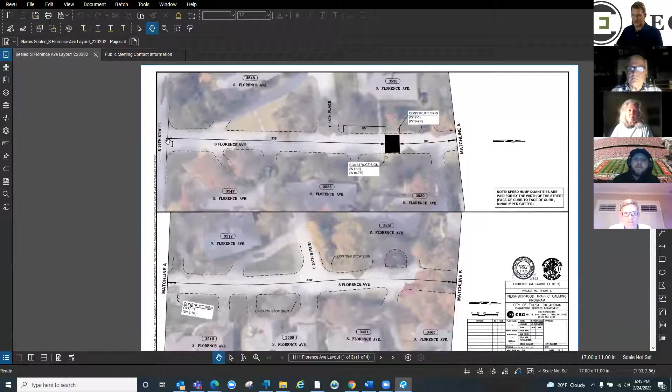On the top left corner, that's the south end of the project at 36th Street, with north pointing up to the right. Our first speed hump is about 330 feet from the south end of the project. Generally we like that a little closer, but with the drives located through here and the proximity to 35th Place, it caused us to push it further north.

We generally try to keep these speed humps, if possible, about 10 feet away from driveways — more if we can get it. The reason is people backing in and out of their drive, we don't want them hitting the speed humps all the time. So we try to get more space between the driveway and the speed hump when we can. We also try not to put them directly in front of sidewalks.

As you can see on this first speed hump, there's a sidewalk going off to the north, but at least we didn't put it directly in front — it's slightly off to the side. So our first speed hump is located just north of 35th Place, around 3530 South Florence Avenue.

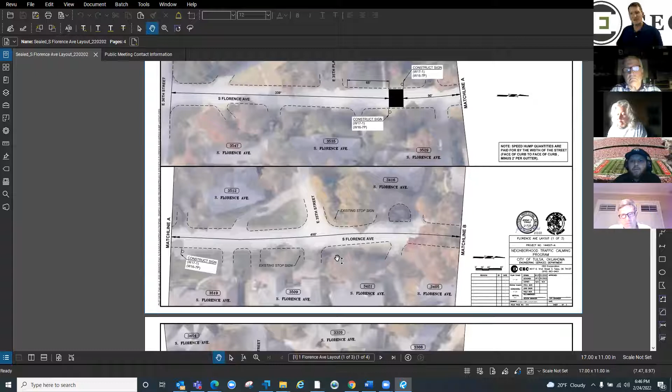Now we've got a big long gap to the next one, because we have stop signs at 35th Street, and we try to keep speed humps away from stop signs since people are already in the stopping motion — we don't want that to happen at the same time. So we stretched this distance to about 600 feet to the next speed hump, shown on the second sheet, immediately south of 34th Street.

Then it's close to another 600 feet from there to the next one. Again, we tried to keep this one a little further from the stop sign at 33rd Street. This speed hump is around 3255 South Florence Avenue, at the bottom of sheet number 2.

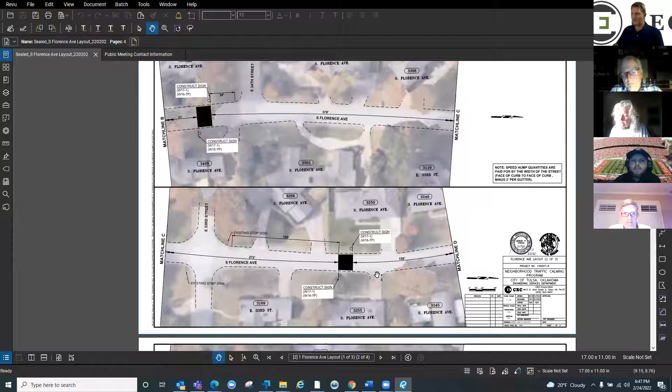Moving further north, we've got about 400 foot spacing to the fourth speed hump, shown around 3220 South Florence Avenue. Our last speed hump, the fifth one, is just north of 32nd Street, approximately 300 feet from 31st Street to the north. The fourth sheet in your plan set is our speed hump details.

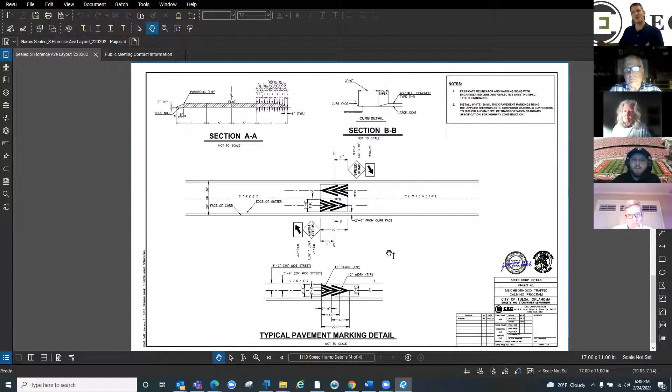I want to focus on what these look like and how big they are. From a plan view, like looking down on the street, this is what the speed hump looks like — it's 22 feet long as your car goes over it. We put this 2 feet from the face of the curb to allow storm drainage water to flow down the street.

As you can see, we've got pavement markings on here per the Manual on Uniform Traffic Control Devices, MUTCD, which governs signage locations and striping. We have signs on the corner of each of these that say speed hump with a little arrow pointing down. Besides the striping on the pavement, this is another notification for drivers to know there's a speed hump. I know the striping will fade over time and the city will do their best to maintain it, but the sign will remain there for a long time and people will be able to see that.

The sign is also there for events like we've had this week, with snow, ice, and sleet. Sometimes it's really hard to see the speed humps when you've got several inches of snow. So if the city or other private entities are plowing the street, we want them to know that speed hump is there, so they can make an adjustment and not damage the pavement or their plow.

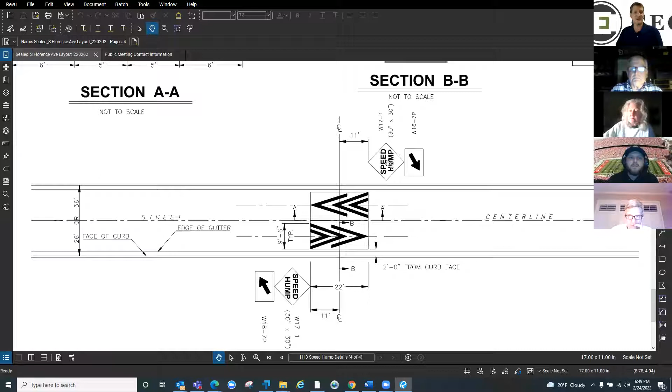So that's what the plan view looks like. From an elevation view, meaning we're looking into the side of the speed hump, this Section AA at the top left corner of the page shows that. The very first 6 foot, the approach, is parabolic in shape. It increases from the existing grade up to 3.5 inches over a distance of 6 foot. It's not linear, it's parabolic in shape, but it's a very gradual transition, and it rides really well.

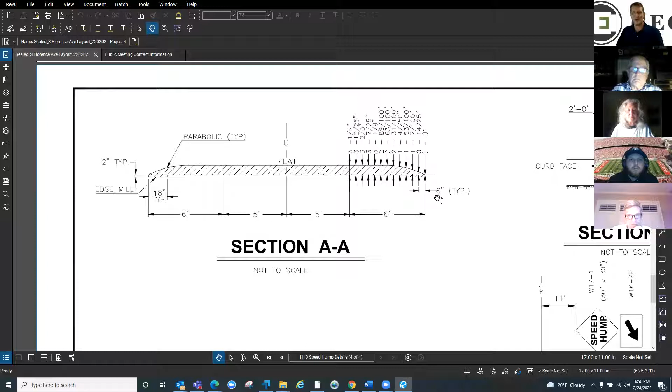If you're going 20 miles an hour, you can go over these speed humps really well, they ride very nicely. There's a platform that's fairly flat on top for 10 foot, and then it shapes back down in a parabolic shape. So these are not speed bumps like you see in commercial areas. They are speed humps, and they do drive well so long as people do not drive at excessive speeds. That was the intention of these.

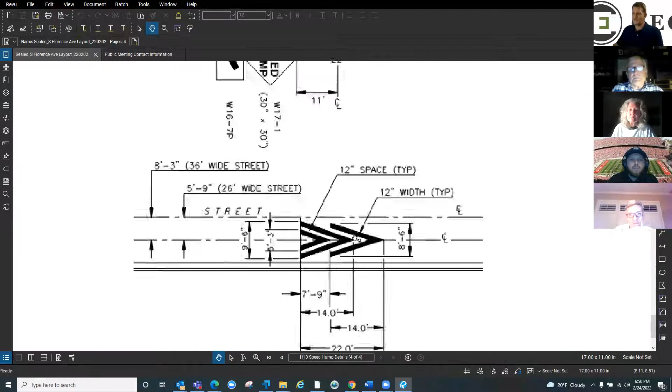This detail down here at the bottom shows the chevron markings for the pavement detail, typical painting for that.

Okay, let me move on with the rest of this. As stated before, our funding source for this program is the Improve Our Tulsa 2 funds. I'm going to stop sharing the screen here, but I'll be happy to go back to that if anybody has any questions.

Construction will begin on this project as soon as possible. One thing that happens after this meeting is we have to allow a 2-week comment period for comments you or others on the street may provide, so we can address those if possible. The city will typically get this video posted on their YouTube channel within a few business days. I anticipate they'll have it up by sometime next week, and that 2-week countdown will start there.

Once that 2-week time is done, if there's anything we can address by changing the plans, we do that, and the plans are finalized and sent off to the Streets and Stormwater Group at the city. The funding is already available to start this.

So the only thing that would be slowing them down is the colder weather. Obviously, we can't construct these speed humps with temperatures in the 20s, so we've got to wait for springtime. Typically by mid to late March, it's warm enough to construct these. Another thing that could hold them back from starting in late March to early April is if there's a lot of road maintenance issues, which get exacerbated dramatically when we have these freeze-thaw periods of time.

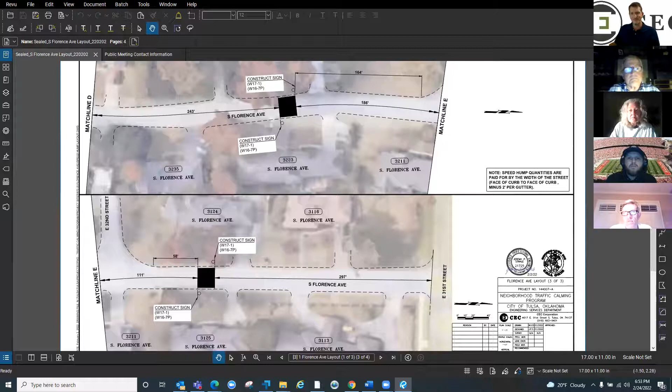I'm now going to go back to the plans, and if anybody has any questions at all, now is a good time to ask. Hey Jeremy, go to the very last page for a second. One thing I want to talk about was section BB - if you can zoom out on that, please.

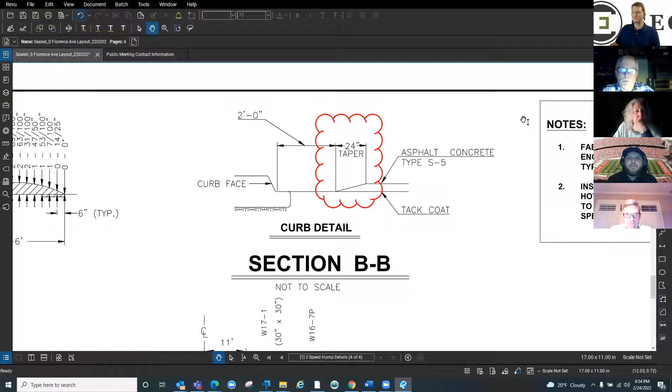So this detail right here shows the beginning of the speed hump from the face of curb, which Jeremy mentioned earlier was 2 foot. We've had requests from bicyclists to add a 2-foot taper to shallow out the edges of it. We'd had some speed humps in the past that weren't as bicycle friendly, and so we got asked by the Bicycle and Pedestrian Advisory Committee to reduce that taper to make it so bicyclists and pedestrians could walk by there a little bit easier. So it not only helps bicyclists, but people pushing strollers or whatever else - it just makes it a little bit more usable speed hump for all users.

Very good, thank you Russell. So does anybody have any questions over this or the layout? Or any questions in general at all? It's what this meeting is about, is to answer any questions you may have.

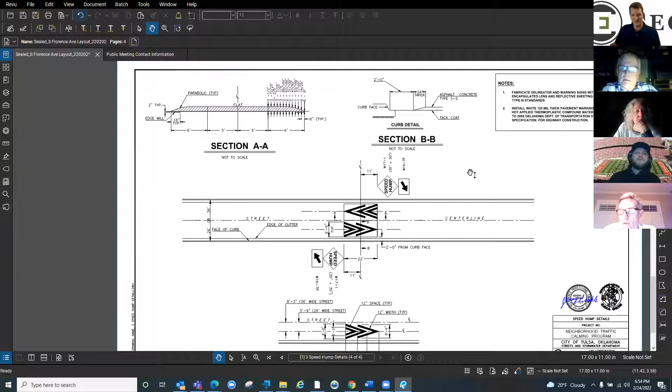Jeremy, I've got a question about the location of the last one in the order of how you've gone through things. That's the one in front of - I'm at 3124 and Dennis is across the street at 3125. Since we don't have it - actually, as you go around the corner on 32nd, we have a proper curb that starts at the corner and runs to the west. But for whatever reason, it seems like they overlaid it enough that the curb's kind of gone, so be it.

We're at the bottom of the hill and I get a ton of runoff water that comes ripping down off my property. And if you can believe it, the house at 3116, when we had that crazy 4 or 5 inch rain, he had a lake underneath his house that was leaking out of his crawl space vents. There's a transformer vault right there - we had surface water going into the vault and making its way through the conduit to the back of Dennis's house and coming up and out of his meter can. So it's possible for us to get a lot of water.

We're kind of concerned about the location of that speed hump, since we don't have gutters, that it can create a dam and start sending water into his yard. There's a manhole cover right where that transformer box is, and the sewer line runs underneath the fence between my house and 3116 and runs up the hill to the west. We're wondering if that speed hump could be moved to the north and placed there so that whatever surface water we've got isn't dammed by this thing, since we don't have good gutters.

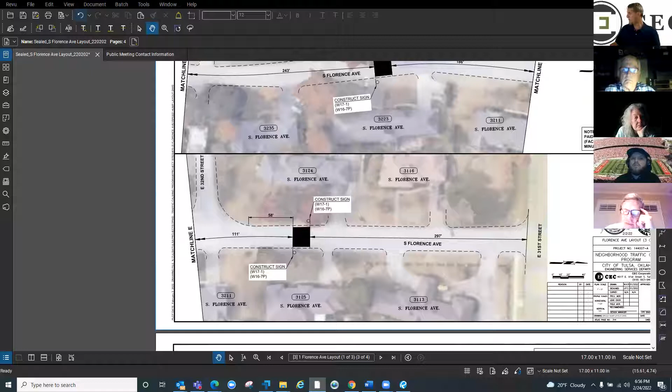Sure, I pulled this up on Google Earth where we could see this a little clearer. So as you said, this is the transformer vault in question, and then we've got a storm - I'm imagining this water manhole right in the middle of the street. We can look into that - it might be possible to put it right up here, in that location. The runoff, elevation-wise, this thing runs to the south here, correct? Okay, very good.

We can look to see - it's too close to try and put it in between here, the driveways are too close together. And this we don't want to do either, because you'd have to push it up pretty far to the north. Visually, how long are your driveways, about 22 feet? They're 22 foot, and we try to keep it 10 foot away from each drive. So we need a space of at least typically 42, preferably 48 or 50 foot in order to put that speed hump in there.

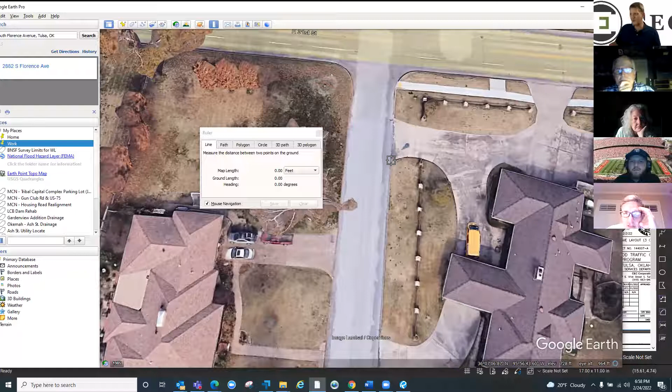It very well could be possible. Mary's got a full turnaround, so I don't think it'd be an issue if you came back and put it close to there—I just don't know how far off of that manhole you need to go and how close you get to Mary's property. She's got that yellow van in the picture. Nobody ever backs out of that driveway, the one here to the south—no, that one right there. So I just don't know if there's enough space between the manhole cover and the start of her driveway on the east side.

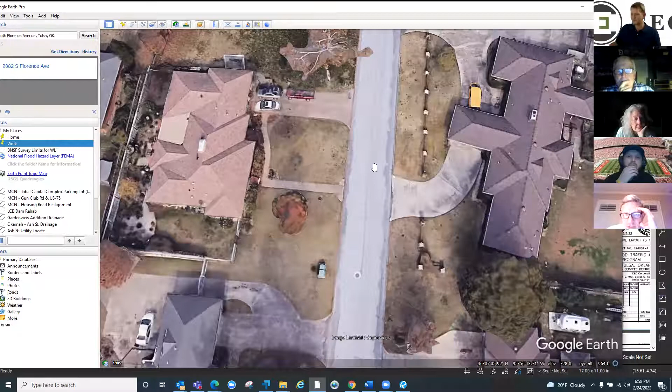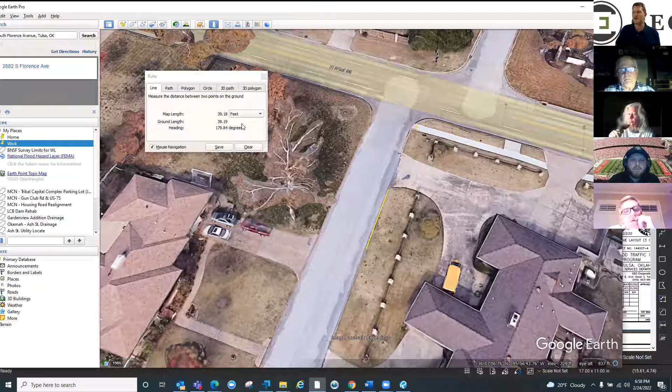I believe the reason we pushed it this far to begin with is the gap we have up at the north end. Taking a distance from that radius up to about right here, that distance is about 40 foot, so it's pushing the limits of what we desire. We could put it in there—we'd only end up with about 8 foot or so on each side. But that may be the next best place to put it, right up there.

The spacing would be too short right here, and I don't think we gain much by putting it right here because we're still right by that transformer, like you said. I'm okay with it being by the transformer, because then somebody's less likely to drive around it, since we don't have much in the way of curbs. I just don't know if there's enough distance between her edge and that manhole cover, since no one ever backs out of her driveway, and I don't see her having an issue.

Right, and it keeps you a little further off of 31st Street, but the concern I'd have is that we have to stay clear of the manhole and the rim around here. So the speed hump would have to start here—the distance I measured with that yellow line is only 26 foot. That would put the northern end of the speed hump probably 2 foot away from her radius, which is pushing it for us to do. I know she normally doesn't back out that way, but if someone's traffic pattern took them south to 32nd, they'd be running over that thing at times.

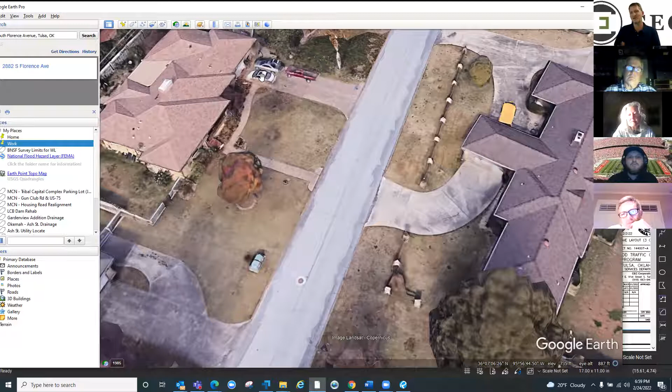So based off what you said, the best place for us to move it would be up here, a little closer to the intersection. We're in good shape with the distance between that next speed hump to the south—we wouldn't be exceeding any distance there at all. So we could probably put it right in this area here.

Hey Jeremy, that distance you're proposing right there, how far south of 31st would that be? Not very far—let's go back to Google Earth here real quick. We'd end up being probably 70 foot away from here. I know ideally we'd prefer it to be a little further than that.

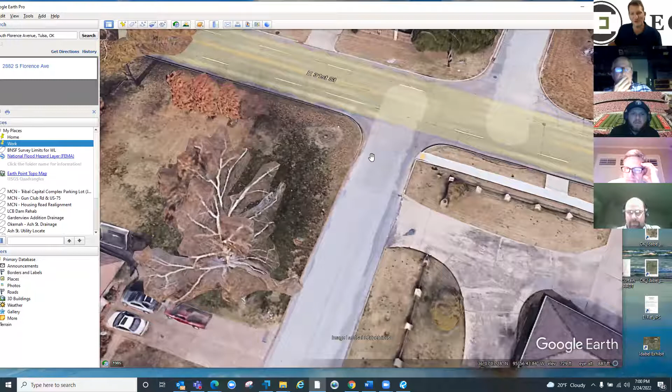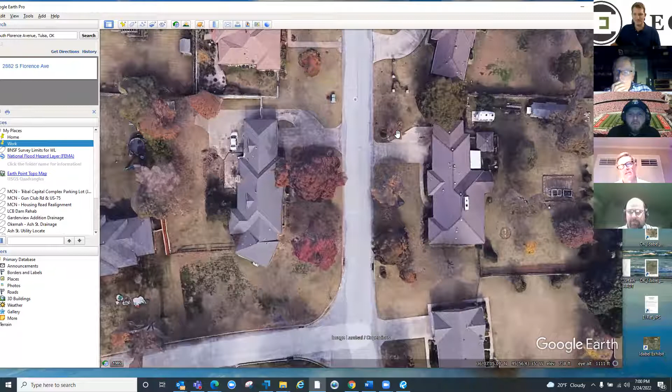Yeah, if that doesn't work, do you guys ever incorporate stop signs as part of this? Because I guess we could consider putting a stop sign there at 32nd, at our intersection. I don't know if that's an alternative. Go ahead, Russell. Yeah, stop signs aren't meant to be used as a speed control. Under the MUTCD, you have to do a warrant analysis and prove that it's actually needed, and the MUTCD does not recommend using stop signs for speed control.

Okay, well, we'll take a look at that. Yes, sir. So that speed hump that's the furthest north—if by chance we take that one out, we'd have the 297 plus 111 plus 186. How far would that push that last speed hump from 31st if the one furthest north is taken out?

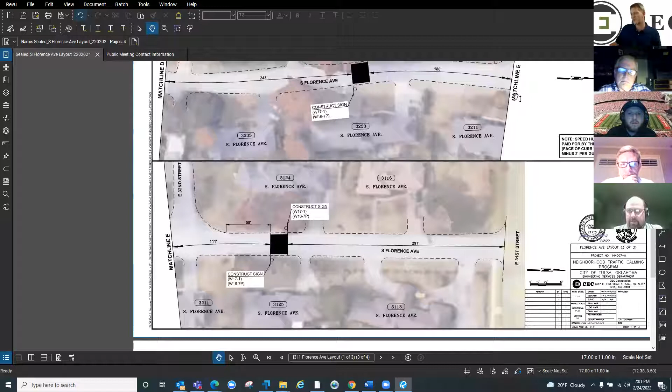Well, what we could do—the one at 32nd, I'd have to look at it, but since there's no stop sign control at 32nd Street, we could slide this speed hump up closer, to where that gap to match line E might be around 80 or 100 feet. That would push us around 350 to 380 feet from the intersection, so eliminating this one might be the best choice, and we just slide this speed hump up further to the north, closer to 32nd Street.

It might be better to do that, especially with the big sump inlets right on his property. That might be a better option than having that one so close to the 31st. We have guidelines that we try to stay between.

It's things like this that we just have to think outside the box. Of course, we don't want to squish it so close to driveways that we're violating that principle. The better thing would be to eliminate one and try to move things around a bit. So I like your idea, Russell.

We could slide this speed hump up further to the north and eliminate that one entirely. That way people coming right off 31st Street aren't hitting the speed hump within the first second and a half or two of their travel, and that way they're not having drainage issues like they're mentioning.

Would that work for you, Bill and Dennis? I'm okay with that, but Dennis, you need to come off mute and let me know if that's an issue or not. You can unmute down in the lower left corner. Or maybe Jeremy, you can unmute him. Okay, can you hear me now? There we go, I can hear you now, Dennis.

If you eliminate this speed hump between 31st and 32nd, there are a lot of people that come down this hill on 32nd Street, fly down that hill and spin around that corner almost on two wheels, and fly up to 31st Street. If you eliminate that hump, that's just going to keep happening. This isn't going to do any good down at this end.

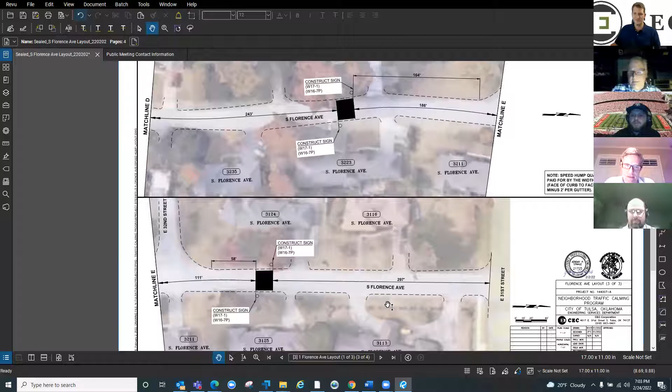So you got to do something. I don't know, either put a stop sign here, and that might not be a bad idea, putting a stop sign. Can you see my cursor?

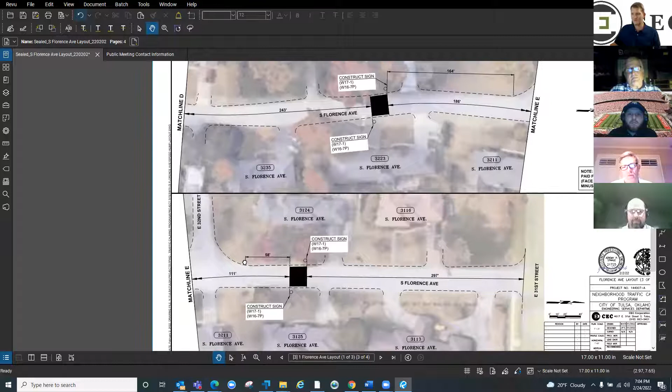No, I can't. You're talking about putting a stop sign. Coming down 32nd Street when you hit Florence Avenue, for people coming from the west to the east, put a stop sign there where these people have to start stopping. So if you eliminate this speed hump altogether, you at least need to put a stop sign in there. And I think that's what they were saying, that stop signs aren't part of the interaction with this, Dennis.

Okay, I think the alternative is maybe - I don't know how this jams up the one further down the road - but if it's got to go between us, if you move it, you're putting it too close. I think it's too close to 31st Street. And if it's too tight to come off of the manhole cover, then it's got to go further to the south.

Right, and that was ideally why we put it in the location it was at. This distance of 297 is technically further than what we ideally want the speed hump to go. We generally try to keep it within 150 to 250 feet from the beginning of the block. So we already violated that because there's no way we could move it into this ideal range because of the manhole and because of the drive location.

So at this end, we put it at the ideal location. It just happens to be near that drainage inlet. Of course, we're not in front of that drainage inlet, but I do know putting this speed hump there will cause more water to move out that way.

I'm interested in the drainage patterns of 31st Street. There's a lot of water that comes off 31st Street, and it is possible to look through the city's programming over the next few years to see if there's any street project going on there, because it may be possible to improve the drainage inlets up at the arterial street to help mitigate some of that water from coming down the street. I've done that on several of our designs where residents on local adjacent streets were complaining about runoff coming off the arterial.

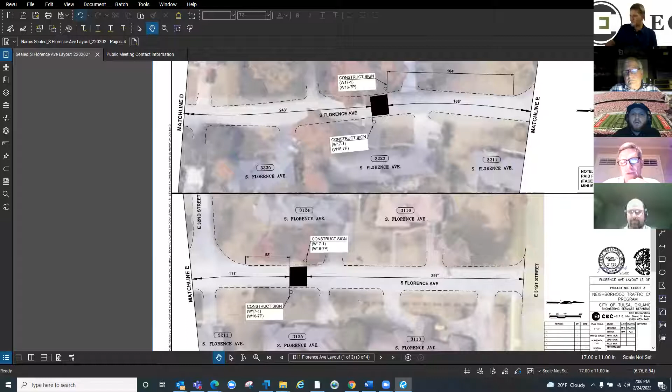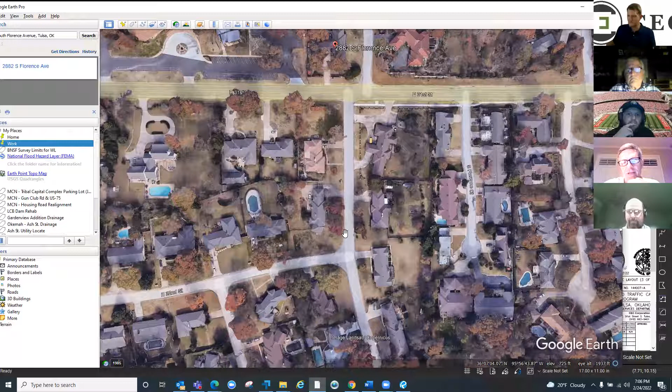There used to be a creek that ran behind Dennis's house, and that's the low spot. On 31st, all the water stays on 31st and ends up in the storm drains down there. When you get past 3116, just past the south edge of their driveway, that's where the crown happens. Anything from there south comes to us, and anything north of that goes to 31st.

So does this water come down here off of 32nd? Is that where the bulk of the water is coming from? No, it's coming off my property through drain pipes. It's actual surface rainwater—we're at the bottom of a pretty big hill.

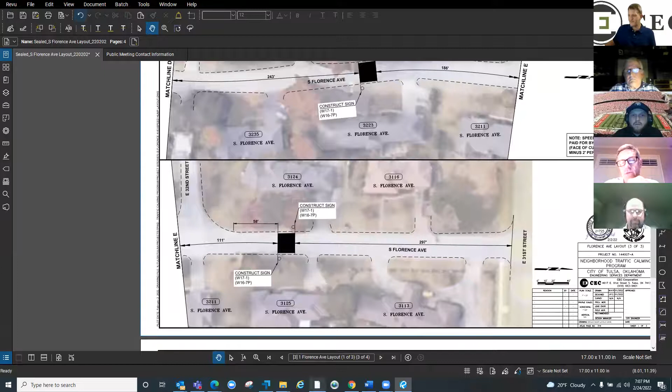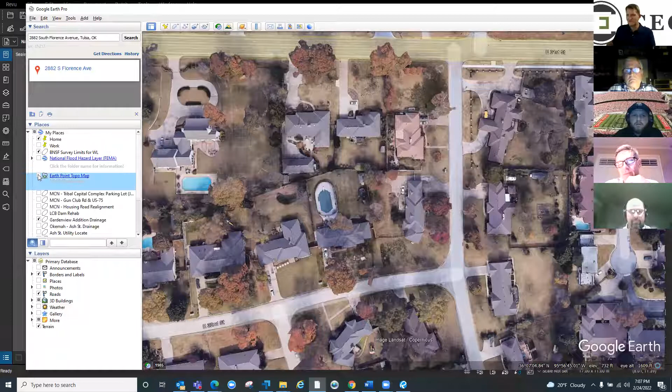Okay, so any of the water on the property that's coming—if you go back to that house, where you've got your cursor all the way up to that house, that's the farmhouse with the pool in the back and the big build out. Anything from there, surface wise, comes traveling down and ends up coming out between my house.

No, this won't help much—it's too fine. We're zoomed in too much on these topo maps. Won't do any good. Those topo maps do great when we're looking at miles of area.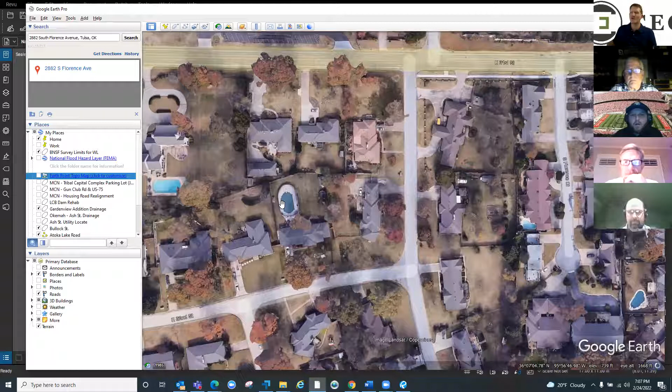So I understand what you're saying—the runoff comes from all the properties to your west, and they all flow through your backyard and into the sump, correct? Yeah, or we're catching them in catch basins and whatnot, and then it comes out, and Dennis just sits below me. So if we put a big dam, all of a sudden we can flood out his garage.

So it's about trying to find a way to slow down the cars without creating a big water issue. Most municipalities have controls when it comes to allowing sheet flow over properties—they only allow so much, and then they require it to go into inlets. The whole purpose is they don't want 10 neighbors' yards worth of water running through you because you're at the bottom of that basin. But they didn't design it that way back in the years—there were no guidelines or controls to prevent that.

Yeah, I've stopped most of it. That's to the west of the house, to the west of me, where your cursor is, covers the pool. I don't get much from them anymore—that goes into a pipe that's running out to 32nd. But it's the houses behind that—I've got a French drain and a catch basin now that's taken their water, because what I built would have flooded 3116's property.

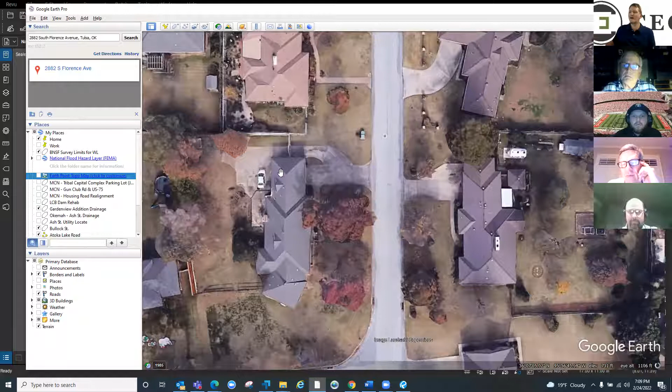So I knew I had to let that water come through, and right now it's on the surface, but it's going into a pipe that's going to have a pop-up right there by the transformer vault box. Dennis and I've seen it as I've been doing construction back here, where that white car shows on my property—there's now a big addition in the back. So I've dealt with all the water, but it comes ripping around my house and down the driveway like a river, so we're trying to figure out the best way to do this.

I know this isn't your purview, and I'll leave it to Dennis on the decision to put the speed hump where he wants it, because he faces the issue more than me—people ripping around the corner and coming down in front of his house at 35 miles an hour.

What is the process of putting in a stop sign if we wanted to go that route? Call 311 and put in a request to put in a stop sign. Okay, and then once that request comes in, we'll do a warrant analysis to see if it meets the warrants per the MUTCD. If it meets warrants, then we can install one, but if it doesn't meet it, it wouldn't be installed.

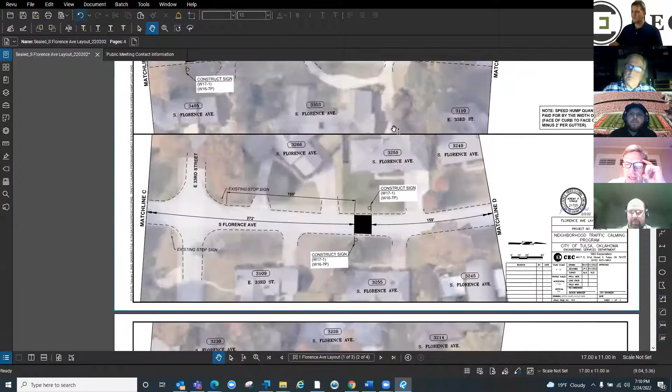Yeah, the stop sign in the middle of this whole plan down there at 33rd-ish wasn't there forever—that one got added maybe 5 years ago. Time goes by, it was probably more than that, but it seems like that was about when they got that one put in to try to calm some of this.

I do know there's been other speed hump projects we've worked on where people knew the right city council member and said, I need a stop sign there, and in the past they got their stop sign pretty easily. The city has gone to the tried and true method of looking at the warrant analysis for MUTCD, and not just haphazardly throwing stop signs around, because they can make the situation worse potentially. That's why they've got that warrant analysis.

That stop sign very well could have gone in through that methodology, because the people who worked on other projects said, yeah, that's so-and-so, he knew Councilman so-and-so and he complained and got a stop sign in. And the city won't do that anymore.

Got it, okay. Well, I appreciate you letting us know about that. We'll take a look at it. If you put that process in, request it through 311, and Russell and his staff will go through and take a look at that.

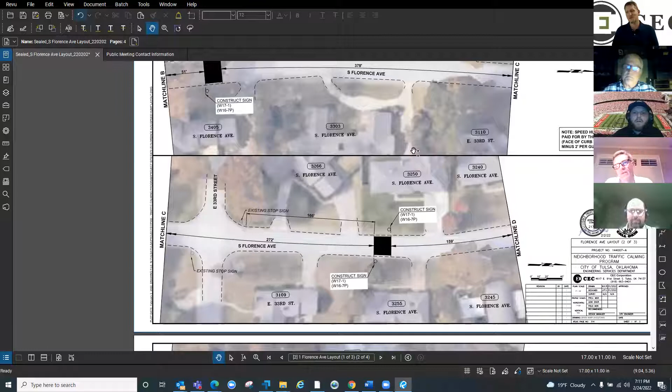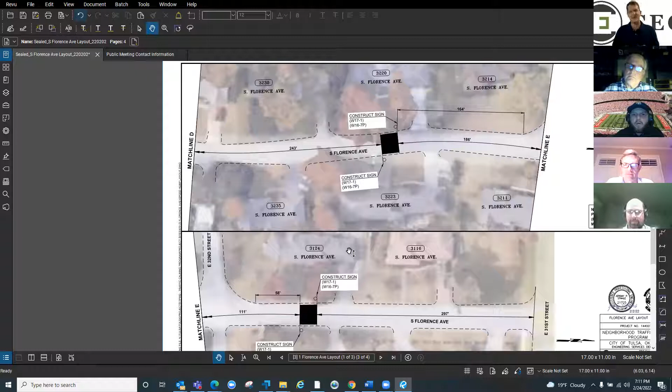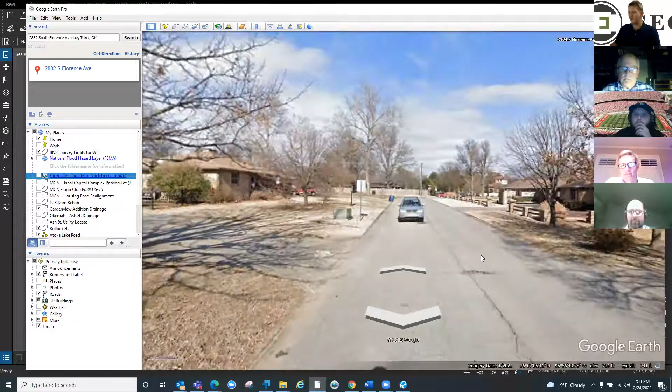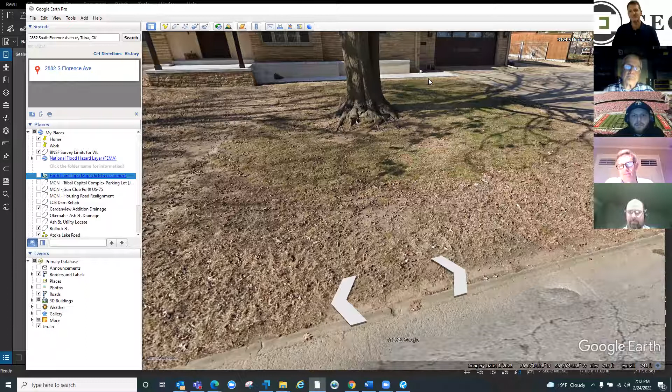I do think the best option is probably to keep the speed hump where we've got it. Ideally that's the best location for it, or we eliminate it, which I know Mr. Murphy is not in favor of because of the speeding in front of your properties. Drainage-wise, this is the sump area, and putting that speed hump in there, especially knowing the curb and gutter sections—let me pull that up and go to street view. Like he said, there's not much curb left. So it will create a bit of a dam there, but the water just flows over the curb like it does now. It's just a big broad drainage area that runs with the water. The finished floor elevations of the houses look high enough that it shouldn't cause a problem.

Hey Jeremy, this is Michael. From looking at the engineering atlas, there is a capital project shown on Florence Avenue from 31st to 36th, currently in design.

Who really? Yes. Wow, I'm surprised we missed that somehow. Do you know who the consultant is on that? CP&Y. CP&Y, okay.

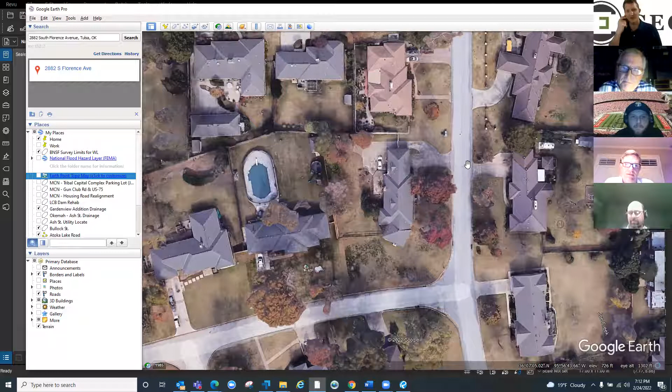What that means to everybody here is, if this street is going to have a rehab project on it, this project very well could delay this, because we don't want to construct these speed humps and then have them ripped up in a year or two for that project. But we're all in favor of having this project constructed at the same time as that one.

The good news about this project is those curb and gutter sections we're talking about issues with—they will come back and probably end up reconstructing the roadway and putting a good curb and gutter section back, which will help when that water hits the street. It won't go flying out into the right of way as much. So that's the good news about that.

I appreciate you finding that, Michael, because that will help with the drainage issue. As a matter of fact, what's the time frame on that?

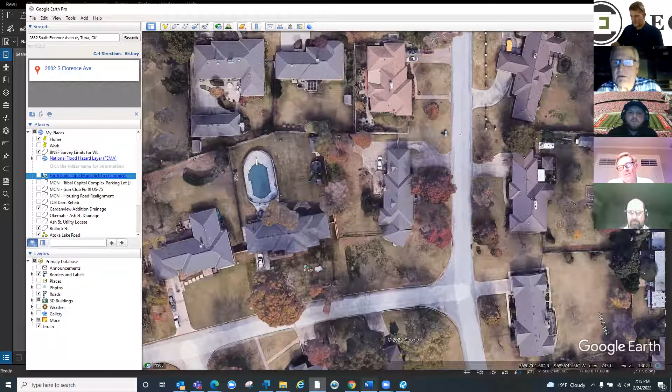The curbs are not like this the entire way. Actually, once you get past 33rd Street, they do have curbs and gutters. So those people down there could potentially get these speed humps while we have to wait at this end, unless they plan on redoing the entire street, which I don't know.

I'm going to look at the Improve Our Tulsa website. Let's see—I can share my screen if you'd like, Jeremy. Yeah, go right ahead, that would be best. Can you share that, or do I need to make you a co-host? Nope, I got the option. Let's see, I need to find it.

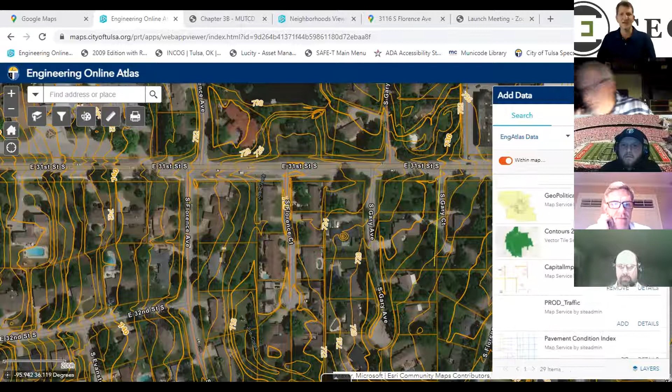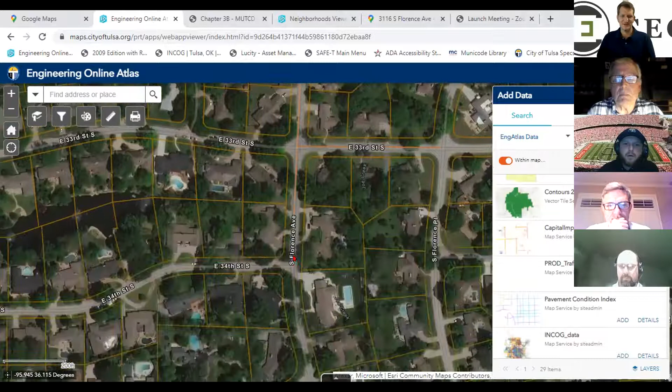The city has a website that provides colorized maps of the streets being redone. They typically don't do just 1 or 2 blocks of the street. It would typically involve the street further to the south—here's Florence Avenue, going all the way to 36th Street. So it's showing the whole thing, and here's some more info about it.

It's in design currently. It was started in 2019, according to this. Its construction start date is listed as 2023. So we're going to have to wait quite a while—that'll be another year potentially.

I do know CP&Y is a large firm there. They're not going to go belly up like that last firm did.

Well, I distinctly remember reading somewhere that they could put these speed humps in, and then if road repair had to be done, they could take them out and put them back in. Well, these speed humps are large asphalt speed humps, so there's no taking them out and putting them in easily. They have to be milled off entirely and then completely reconstructed.

But with this information, the good news is they should fix the curb and gutter on the street and fix the street drainage. I'd imagine that overlay is thicker in the area in front of your properties because of the large amount of water coming off of there. If the water doesn't drain well, it causes the subgrade to stay damp, and the pavement literally sinks down into the ground. That is very common.

When they came back, they put on a heavier overlay because the asphalt was probably alligator cracked badly due to subgrade issues. That's why this area has experienced shallow curbs compared to further south, where they don't have that problem. At least that's been my experience doing roadway work for the city.

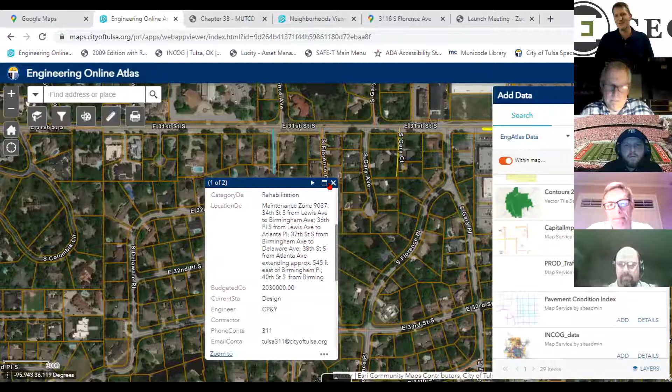Okay, thank you for sharing that, Michael. I'll get with Patty tomorrow morning and she can give me an update on that. And of course, if this works, we'll coordinate with CP&Y and make sure they include our plan sheets into their plans, and we'll bid this out. That will unfortunately delay this project probably a year, but the city's always looking for the best way to handle this. If it can be done all together at the same time, we want to do that—we want to be good stewards with the city's money.

Dennis, you want to call 311 and see if we can get a stop sign process rolling, especially if we're late on this other stuff? Wouldn't be a bad idea—at least we'll get something out of this. We'll let Bill do that. You want to ramrod that, Bill? You seem to be pretty good at those things. I can try—it's right across the street from you. I can try.

Well, any other questions that you have on this project or the program? I'm a little bit discouraged—that's all I can tell you. I don't have any questions.